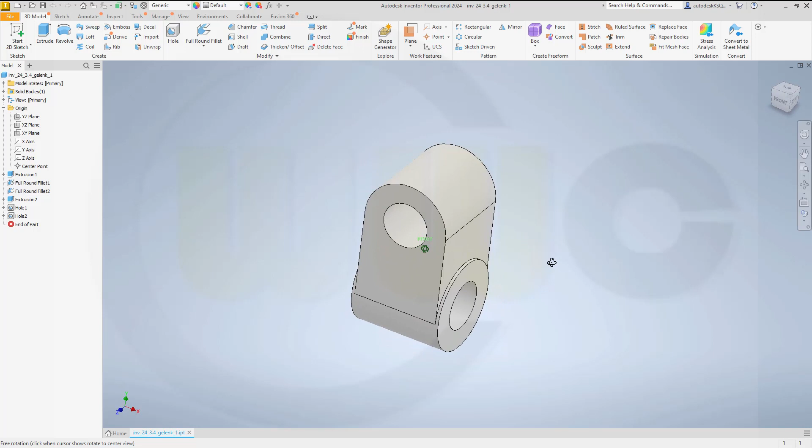You could do this in many ways, and I want to show you, I think, a more efficient way. Let's take a look at the drawing. So here it is, and I've mentioned it already. It's a very basic and quite simple exercise. But let's have fun with Inventor.

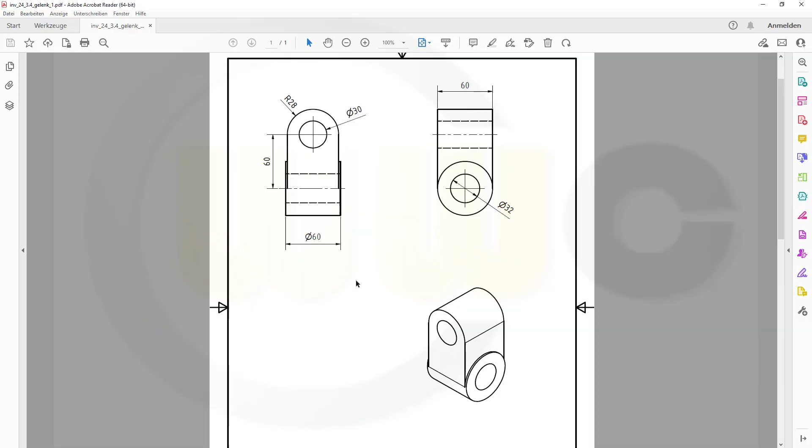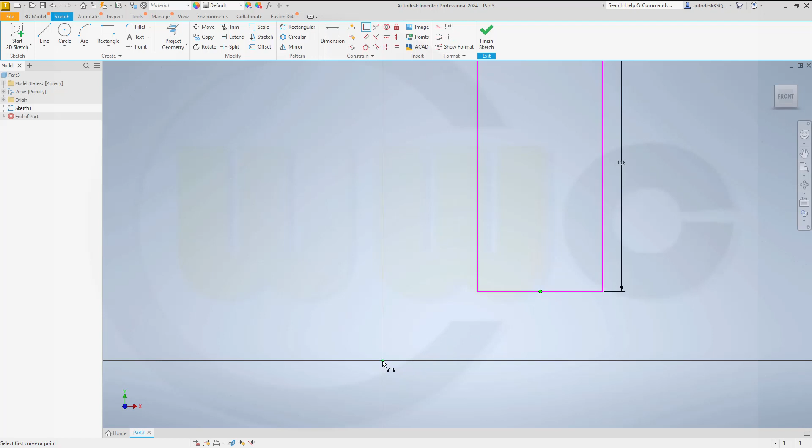Okay, let's start with a sketch on the XY plane. This will be a rectangle, and it should be 56 by 118. Now make it symmetric with that constraint between the origin and the midpoint of that line. Finish that sketch.

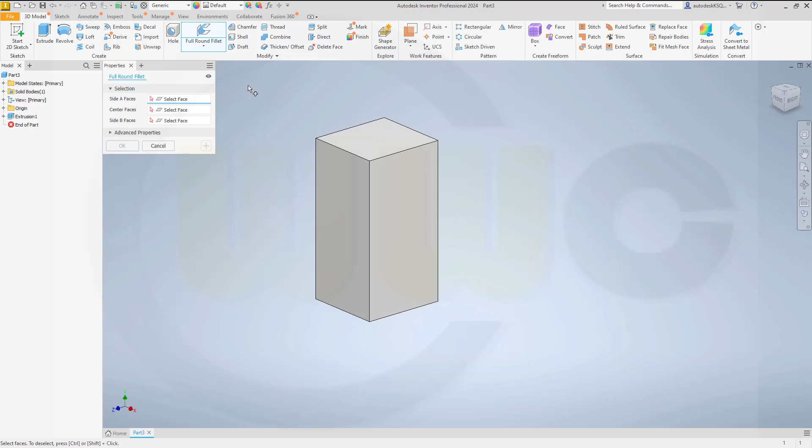Let's make a symmetric extrude, and this should be 60. Now don't use 2 fillets, but just 1 full round fillet. Plus, and this face, that face, and this face.

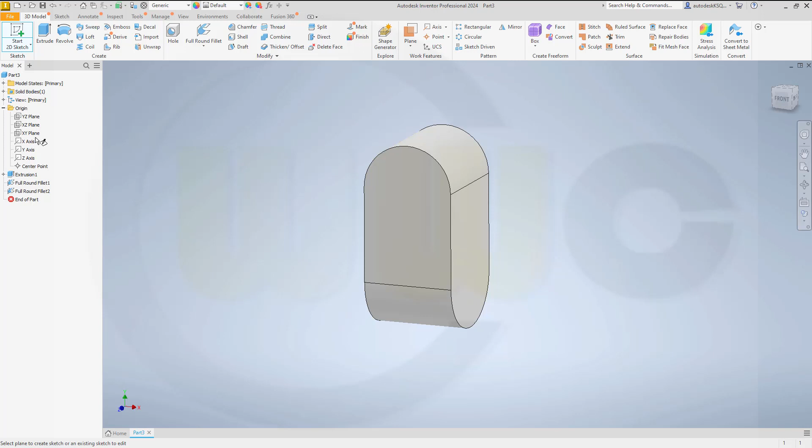And we got our base body. Now another sketch on that should be the YZ plane. This one here.

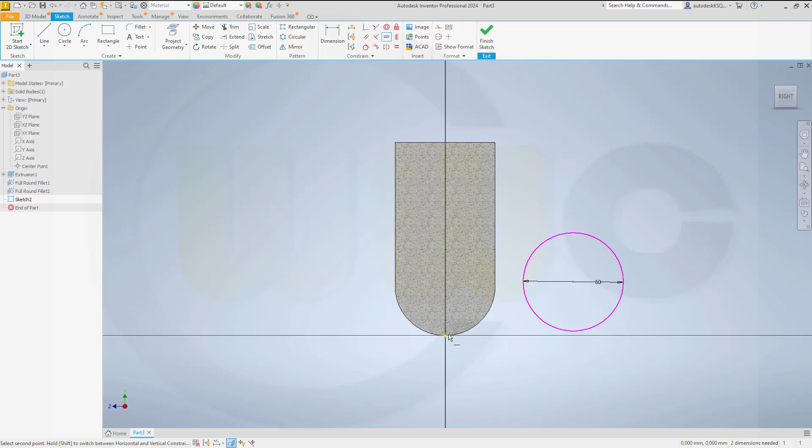Slice the graphics. Make a circle, make it 60 diameter, and this should be, in this case, horizontal aligned. Please note those sketch axes are swapped, and the distance should be 30.

Finish that sketch, make another symmetric extrude, again 60 millimeter. Now let's go for the hole. So it should be through all, diameter should be 30.

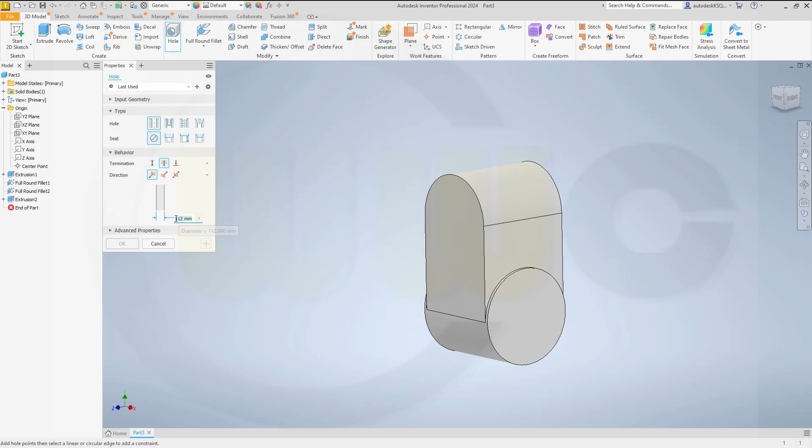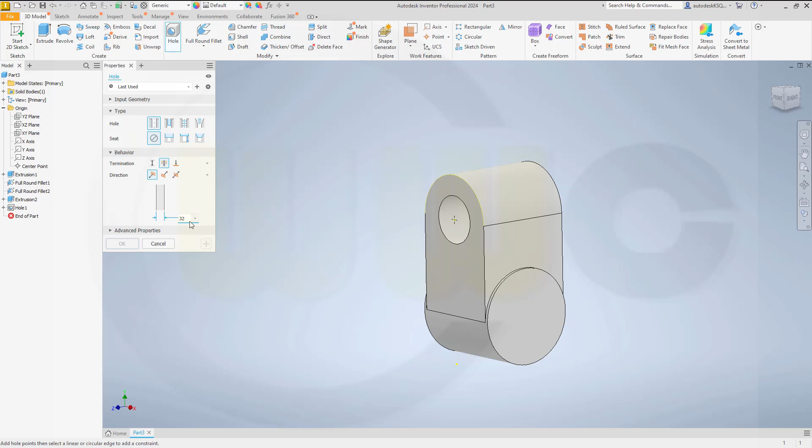Select the face, select that edge as reference, so it's centered. Go for a plus. Now the diameter should be 32. Again, select the face, select that circular edge as reference, and it's centered, and okay, and I'm done.

So I hope this was helpful. I hope you liked it.